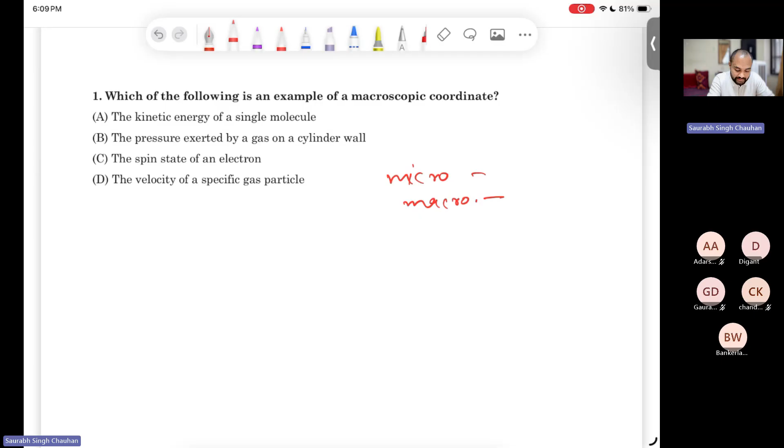Okay. So we have discussed microscopic and macroscopic. In microscopic we discussed at the particle level, the molecule level, and in macroscopic we discuss at a little bigger scale, so we assume that things are continuous. Okay. So in microscopic description,

I think someone is trying to say something.

I don't know. So option A says the kinetic energy of a single molecule. So no, we don't discuss the kinetic energy of a single molecule in the macroscopic coordinate system. Not even in microscopic. In microscopic, we have a distribution. Okay. So these many particles can have this much kinetic energy. This much percentage of particles can have this much kinetic energy. Like that we discuss in the microscopic. For a single molecule, we don't discuss like that. And in the macroscopic coordinate system, we don't discuss these things.

Okay. The pressure exerted by the gas on the cylindrical wall. So this is the correct option. Another option says the spin state of an electron. Again, this is not correct. And the last option says the velocity of a specific gas particle. Again, for a specific gas particle, we don't discuss in the macroscopic version. And in the microscopic version, we discuss some sort of distributions. These many particles can have this much kinetic energy, these many particles can have that much velocity, like that. Okay.

And the results of both of these, macroscopic and microscopic, will ultimately yield the same results. But in this course, we will mostly be focusing on the macroscopic version. Okay. So this is just like a definition. I don't think there should be any problem.

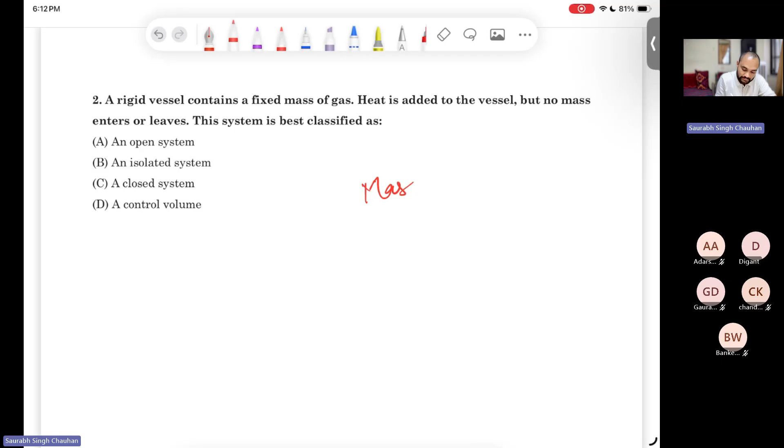The next question says, a rigid vessel contains a fixed mass of gas. Heat is added to the vessel, but no mass enters or leaves. This system is best classified as. So again, very easy question, definition based. We have discussed several types of system: open system, closed system, isolated system, control volume, adiabatic system. So you can easily answer this question, right? So which type of system is this? It is saying that mass transfer cannot take place, but heat transfer can take place. Okay.

Option C, yes, option C. In an open system, mass transfer can take place. In an isolated system, there will be no interaction, neither mass transfer nor heat transfer. In the closed system, there will be no mass transfer, but heat transfer can take place. So for this particular vessel, heat is added but no mass, so it should be a closed system. And control volume, again, is more like an open system. Okay.

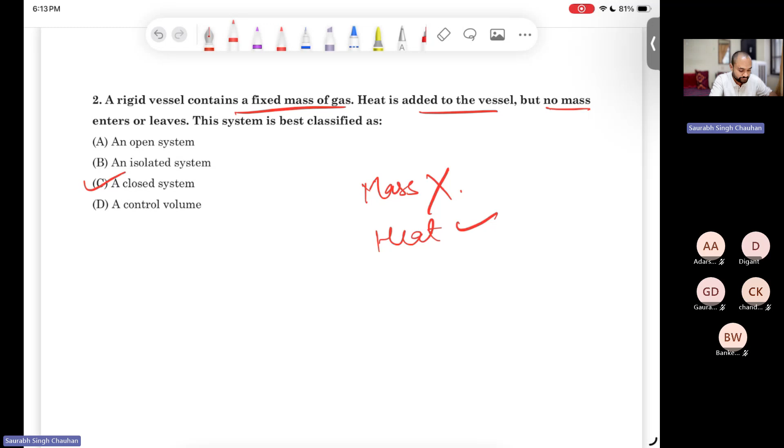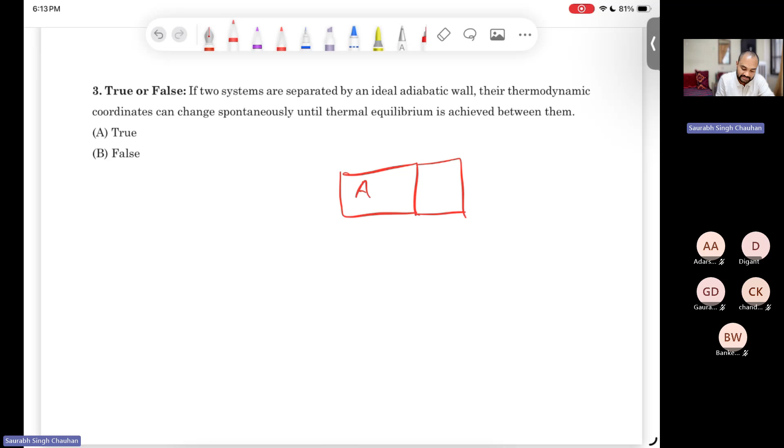The third question says, here's a statement: if two systems are separated by an ideal adiabatic wall, their thermodynamic coordinates can change spontaneously until thermal equilibrium is achieved between them. So there are two systems, system A and system B, and in between there is an adiabatic wall, and they can be at different temperatures initially. Since this wall is adiabatic, there will be no heat transfer, so they will never come to the same temperature. Thermal equilibrium will not be reached, so it should be false, right?

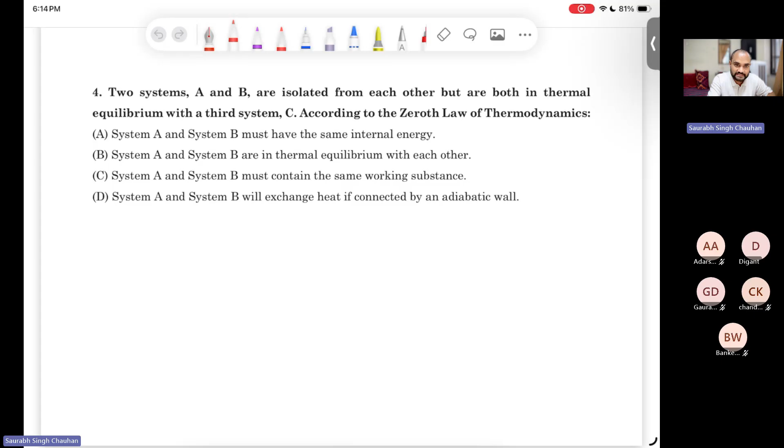I think these questions are very easy, so you can suggest that we should discuss a little more advanced questions, or keep this level, or dilute the level. As per your suggestions, I will make the questions accordingly for the next session. Okay, we need to improve, I think. Sure, sure. So from next session, I will try to bring a little more conceptual questions.

Okay, the fourth says that there are two systems, A and B, isolated from each other, but in thermal equilibrium with a third system, C. According to the zeroth law of thermodynamics, system A and B must have the same internal energy. System A and system B are in thermal equilibrium with each other. The third option says both systems A and B must contain the same working substance. And the last option says both systems will exchange heat if connected by an adiabatic wall.

So again, this is the zeroth law of thermodynamics. Two systems, A and B, are in equilibrium with C, so both of these should be in thermal equilibrium as well. That is what the zeroth law says. Option A says they will have the same internal energy. This is not correct, because they will have the same temperature, and internal energy per unit mass will be the same, but the total internal energy can be different. If system A is bigger and B is smaller, even at the same temperature they can have different internal energy.

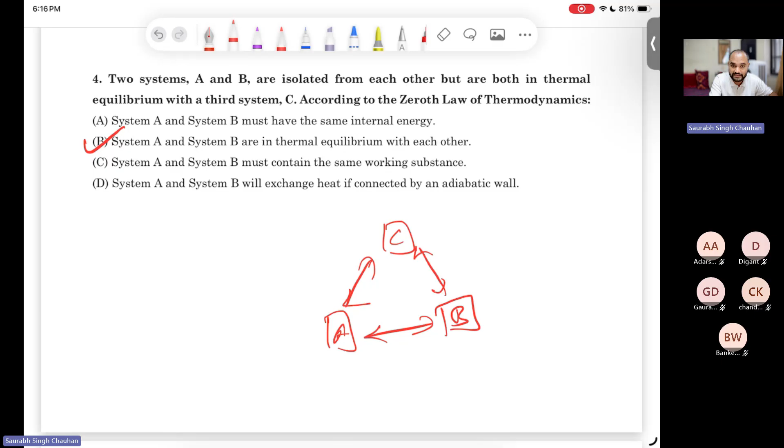And the last option says they will exchange heat if they are connected by an adiabatic wall. So if they are at the same temperature, then why should there be any heat transfer? And even if they are at different temperatures and the wall is adiabatic, again, there will be no heat transfer, right? So only option B is correct in this case. Okay.

And the fifth question says that for a simple compressible system, the equation of state relates pressure, volume, and temperature. How many of these coordinates are truly independent? So you might have studied the Gibbs phase rule, right? So if there is some phase, and there can be some independent chemical components, how many independent thermodynamic variables are there? So this Gibbs phase rule is the relation among these variables, right? So for this simple compressible system, how many independent variables are there?

So the Gibbs phase rule, if I write it, is F is equal to C minus P plus 2. Okay. So F is basically the number of independent variables, or you can say the degree of freedom. So degree of freedom is nothing but the number of independent variables.

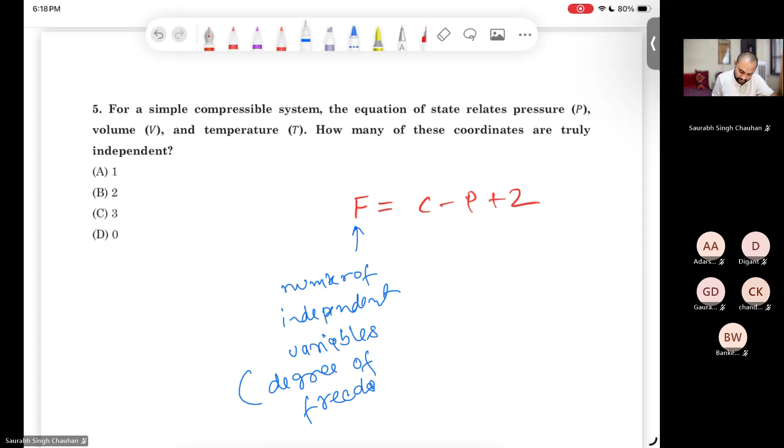C is the number of chemically independent components, and P is the number of phases. Phase means there can be some liquid phase, vapor phase, okay, like that. So for a simple compressible system, there is only a single phase, okay. So P is equal to 1, and let us assume there is only one chemically independent component.

There is any gas, or there can be some mixture, but the chemical composition is fixed, okay. The number of chemically independent components, let us say it is 1. So C is again, let us say, 1. Okay, it is saying simple compressible system. So for a simple compressible system, you can assume there is some piston cylinder arrangement with some gas, let us say oxygen. So this is a simple compressible system.

So F you can easily tell now. C minus P plus 2, so it will be 1 minus 1 plus 2. Okay, so only two variables will be independent. So the degree of freedom is 2. So here it is saying pressure, volume, and temperature. So can all three of these be independent? The answer is no. If you have any two of these, then you can find the third one from the other two. So pressure, volume, and temperature will be interrelated; there will be some function.

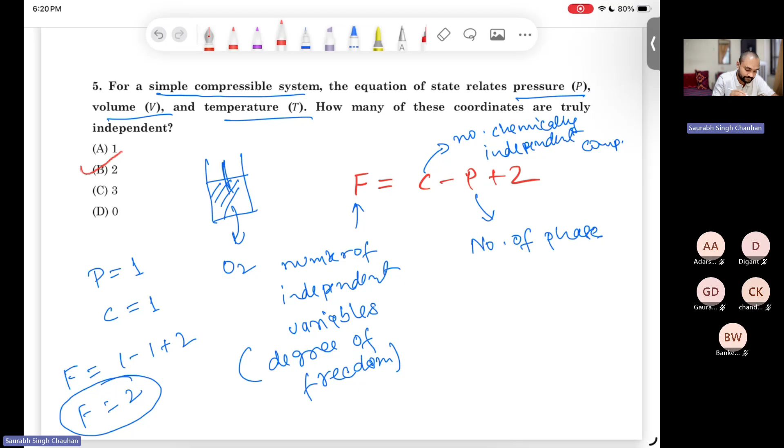So either temperature and volume can be independent, or you can have pressure and temperature, then you can calculate volume, but there will be only two independent variables. Okay, so the answer should be option B. Okay, this is the Gibbs phase rule, by the way. So I hope this is clear. If there is no doubt, then we will move to the next question.

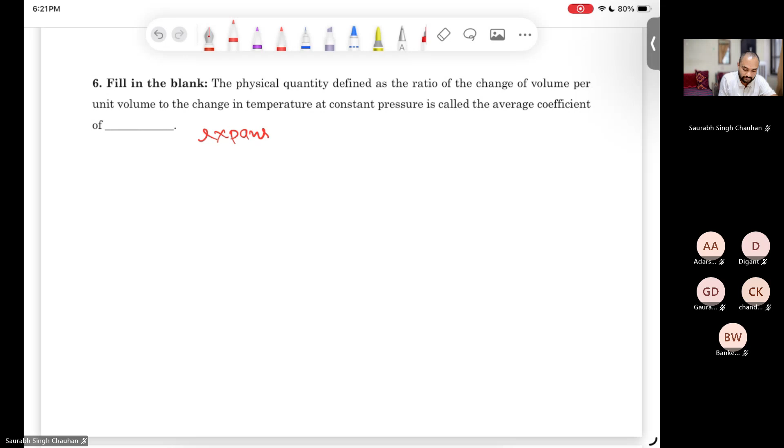Question number 6. It is saying that the physical quantity defined as the ratio of the change of volume per unit volume to the change in temperature at constant pressure is called the average coefficient of expansion, right? Or expansivity, we can say. And how do we define that? It is already saying per unit volume, so 1 by V, and change of volume to the temperature, so del V by del T. So it is the rate of change of volume per unit volume with respect to temperature at constant pressure. Okay, so this thing.

Okay, and we call this the expansion coefficient, or expansivity, you can say. So this was question number 6. Okay, now the next question.

Question number 7 says that the isothermal compressibility of a gas is defined mathematically as. So this is again a definition. We have already discussed these things in lecture. So which option is the correct one here? In the previous one, it was change of volume with respect to temperature per unit volume at a given pressure. Here it is option A. Yes, option A, rate of change of volume with respect to pressure at a given temperature and per unit volume. Okay, and there is a negative sign. Why is there a negative sign?

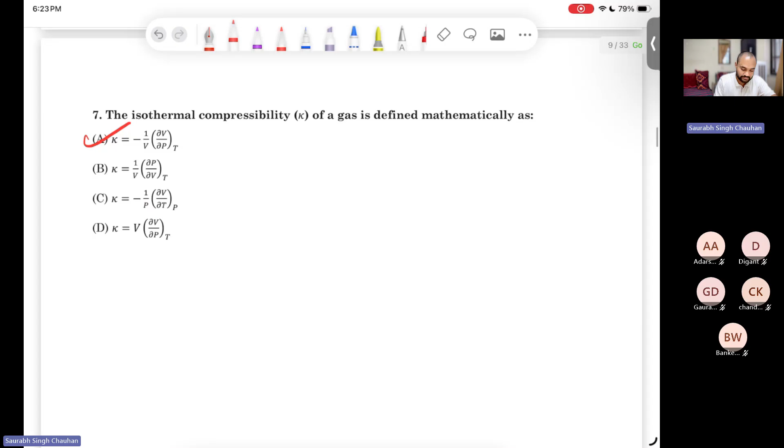We know that if we increase the pressure, then the increase in volume will be negative, or we can say that if we increase the pressure, then volume will decrease. Okay, so this quantity will be negative. And if we put a negative sign just before this 1 by V, this will make this K positive. So this will ensure that this coefficient is positive. But in the case of the coefficient of expansion, there was no negative sign. Okay.

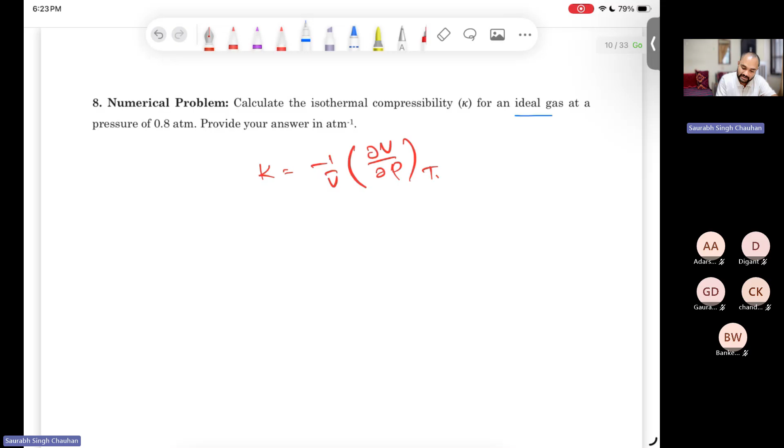Now coming to the next question, question number 8. Question number 8 says calculate the isothermal compressibility. So compressibility, this thing, right? K is minus 1 by V del V by del P at constant temperature, for an ideal gas at a pressure of 0.8, and we have to give our answer in atm to the power minus 1. So it is saying ideal gas. So for an ideal gas, what we have? We have PV is equal to RT. This is the ideal gas equation.

So what we have to find? We have to calculate the isothermal compressibility, K. To calculate K, we will have to calculate this quantity. So first of all, let us try to calculate del V by del P at constant temperature. So how will we calculate? We have this ideal gas equation PV is equal to RT. We can write V is equal to RT divided by P.

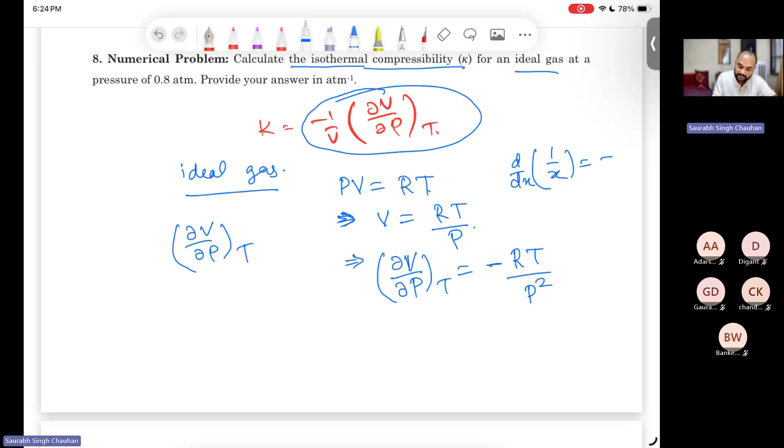So if we differentiate this V with respect to P at constant temperature, what will we get? We will get RT divided by P square, times minus 1. It is like differentiation of 1 by X with respect to X, where we get minus 1 by X square. And we need to multiply this by minus 1 by V, because K is minus 1 by V times del V by del P at constant temperature.

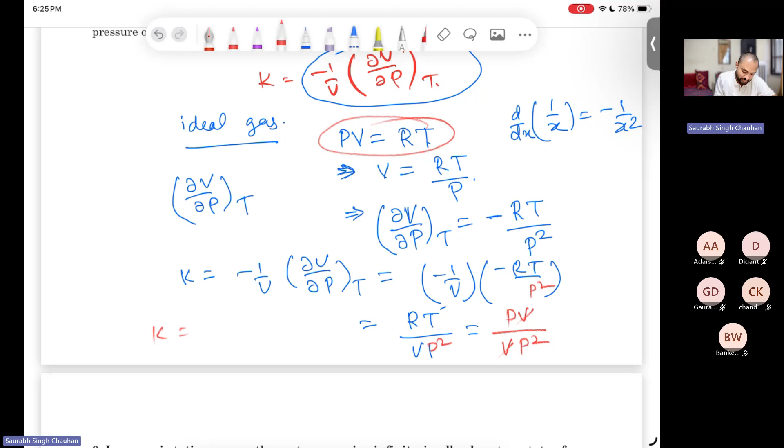This thing we have already calculated. So minus 1 by V times minus RT by P square. So we have RT by V P square. And RT, from the ideal gas equation itself, we can write as PV. So PV over V P square. So V and V will cancel out, and we will get K is equal to 1 by P.

And P here is given as 0.8 atmospheric pressure. So K will be 1 by P, that is 1 by 0.8. So you can calculate, this will come out to be 1.25 atm to the minus 1. So this is the answer. Okay. Fine.

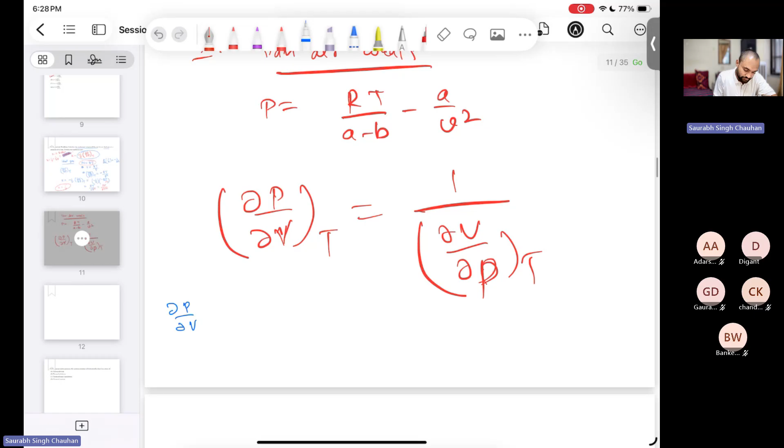Okay, I'm just giving an example. In the previous question, it was an ideal gas. So if it is not an ideal gas, then how will we proceed? So let us try to calculate del P by del V at constant temperature. So the first thing is, have I missed something?

It is not A, it is V, right? Okay, so if we try to differentiate the first term, what will we get? We will get RT divided by V minus B squared. There will be one negative sign, right? So this is the derivative of the first term. Then the derivative of the second term, it will be a minus, in place of V square, V cube, and this negative sign will make it a positive, and there will be 2, right? Power will come out as a coefficient.

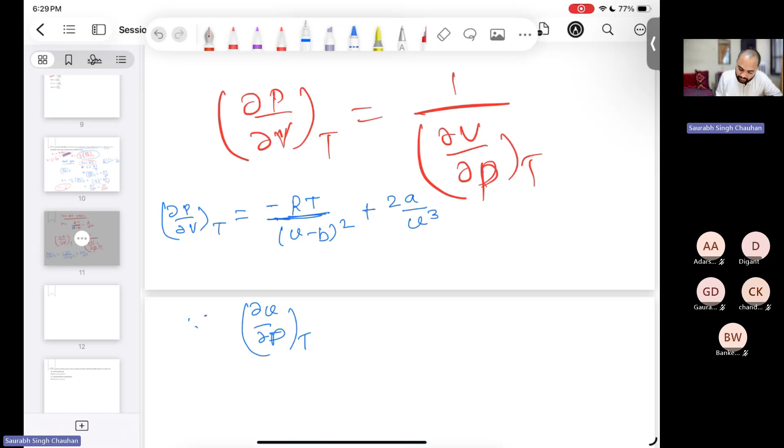Okay, so like that. And since we know that del V by del P at constant temperature will be simply the reciprocal of del P by del V at constant temperature. Okay, so we can write K is equal to minus 1 by V and this thing, right? 1 by del P by del V at constant temperature. And this del P by del V at constant temperature we have already calculated.

So what will we get? We will get 1 by V whole thing divided by minus RT divided by V minus B square plus 2A by V cube, right? Correct. So this will be K if we use this van der Waals equation instead of the ideal gas equation. Okay, so this is just an example.

So we can have some other equation. There are a lot of equations of state, right? Not just the ideal gas equation or van der Waals equation. So for a given equation of state, you can find what will be the expression for this K, right? You can find the isothermal compressibility formula for any given equation of state. Okay. So now proceeding to the next question.

Question number 9. It says that in a quasi-static process, the system remains infinitesimally close to a state of. Option A says non-equilibrium. Option B says thermal imbalance. Option C says thermodynamic equilibrium. And option D says chemical reaction. So again, a definition-based question. So a quasi-static process remains infinitesimally close to thermodynamic equilibrium. Okay.

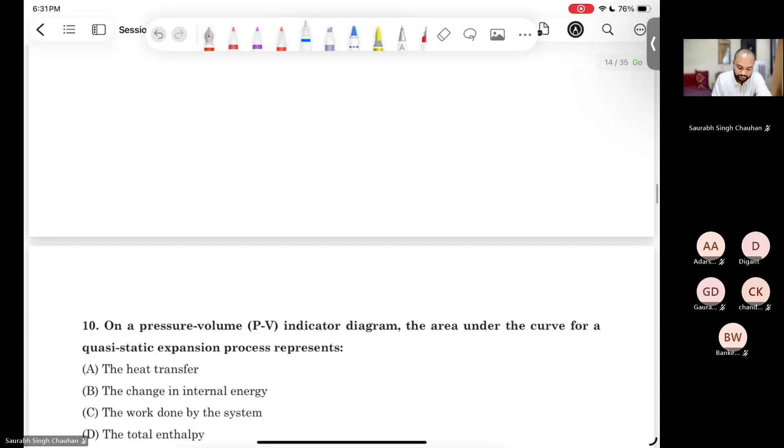Question number 10 says, on a pressure volume indicator diagram. So we know what an indicator diagram is. Indicator diagram is nothing but this PV diagram. So we call the PV diagram the indicator diagram. The area under the curve for a quasi-static expansion process represents what? We already know the area under the PV curve. This will be integration of P dV, right?

Option C. And so this will be the work done. First option, heat transfer, no. Option B says the change in internal energy, again, no. Third option says work done by the system. So this is correct. And total enthalpy, again, this is not correct. So option C.

11th question, it says which of the following expressions correctly represents the work done during a reversible isothermal expansion of an ideal gas from volume V1 to V2? What does this say? Correctly represent the work done during a reversible isothermal expansion process. Option C. Option D. D, sir. D.

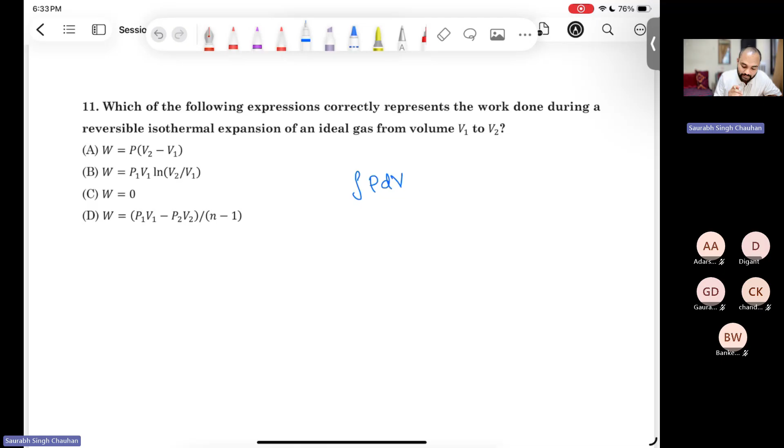Okay, we have work done is equal to area under the curve, or you can say integral of PdV. So this is work done, number one. Number two, it says ideal gas. So PV is equal to RT. Fine. Third, what does it say? It is saying isothermal. So isothermal means T is constant.

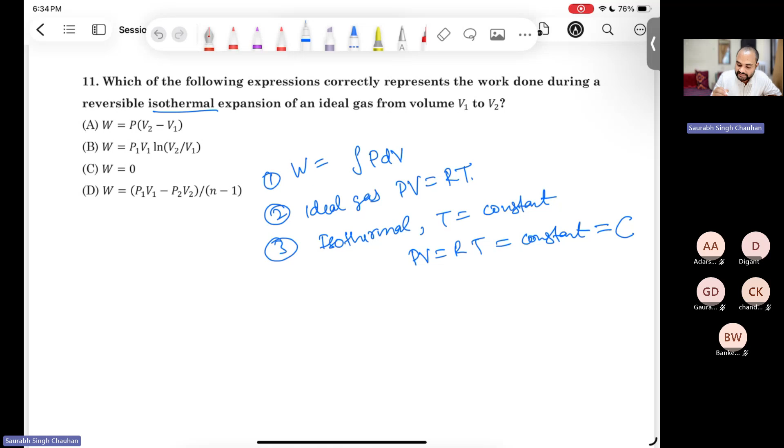Since T is constant, you can say PV is equal to RT. R is already constant, T is constant. So PV is constant. And this constant you can write as any constant. Let us say it is C. So P you can write as some constant divided by V for an isothermal process. And for work done, W is equal to integral of PdV, and P we can write as some constant divided by V, dV. It's integration from state 1 to state 2.

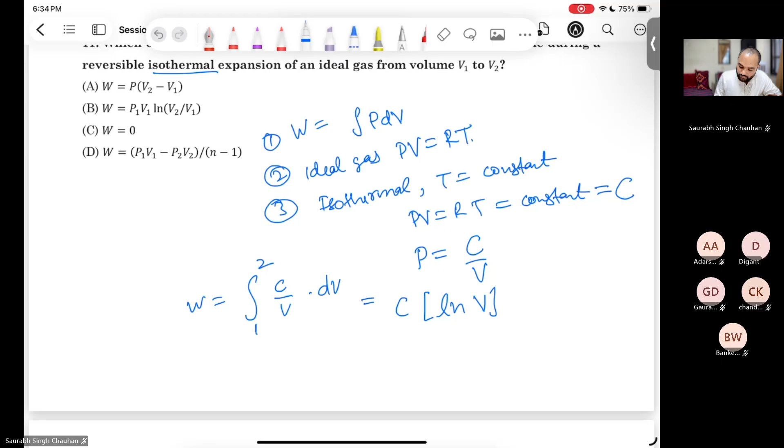So integration of 1 by V with respect to V will be ln, the logarithm of V. And this constant C will come out, right? And we will have the limits of integration, V1 to V2, right? And this will be C times ln V2 minus ln V1. And you know the properties of logarithms. If there is log A minus log B, you can write that as log of A by B, correct?

So this work done will be that constant times log of V2 by V1, correct? And this C, what was C? C was this thing, PV, that is equal to RT, that is constant.

Okay, so you can write W is equal to P1 V1 ln V2 by V1, that will be equal to P2 V2 ln V2 by V1, that will be equal to RT ln V2 by V1. Okay, so all of these three are fine.

Okay, so which option now? Option A, no, this is not correct. Option B, it says P1 V1 ln V2 by V1. This is correct. Third option says W is equal to 0. Again, this is not correct. Fourth option says P1 V1 minus P2 V2 divided by n minus 1. Again, this is not correct. So only option B, second option is correct. Okay.

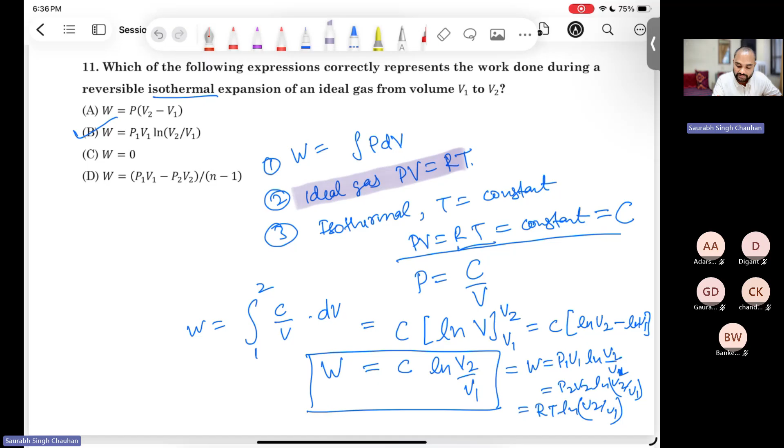So again, in this question, it was given that this is an ideal gas. So we have the equation for ideal gas. If it was not an ideal gas, or you had some other state relation, then you will use that particular relation for pressure and volume. In this particular case, we have used this relation between pressure and volume. If there is some other relation, we would have used that relation. And in that relation as well, since it is given it is isothermal, we will assume T is constant. That's what isothermal means.

Now coming to the next question, question number 12. It says that for a closed system that undergoes a cycle, the cyclic integral of heat transfer is equal to the cyclic integral of work transfer. So we know that a cycle means that we are coming back to the same state with which we started, right? And we also know that heat transfer del Q is equal to some work done plus change in internal energy. Okay.

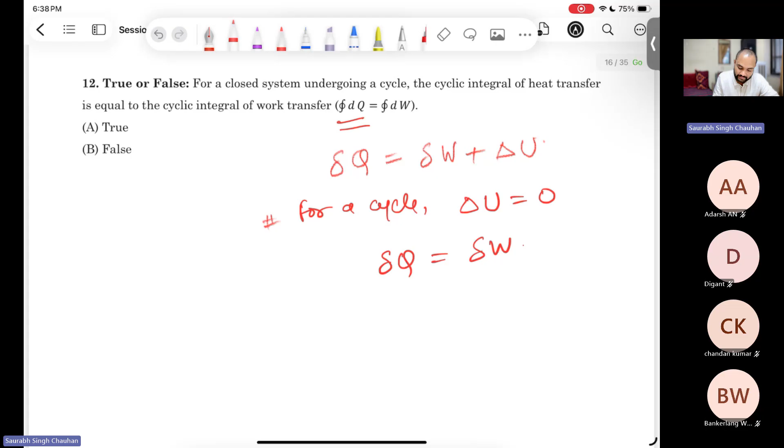For a cycle, this del U will be 0, right? Because again, we are coming to the same point. And this internal energy is a point function. So there will be no change in internal energy if we are coming back to the original state. So del Q will be equal to del W, right? So the cyclic integral of this heat transfer will be equal to the cyclic integral of this work transfer. Okay, so this is true.

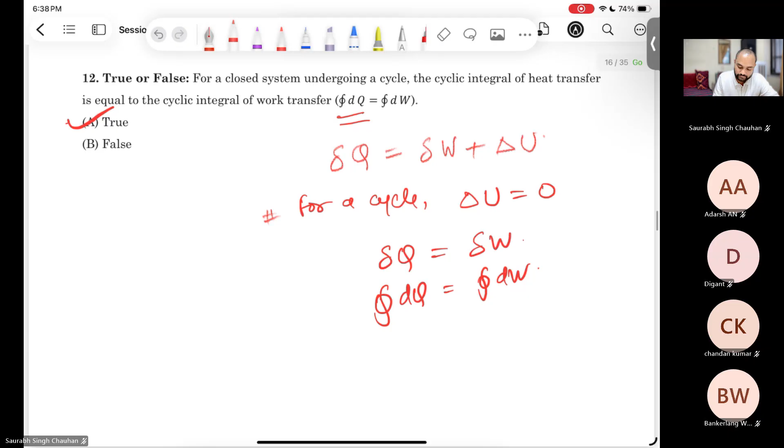Now coming to the next question, question number 13. It says the internal energy U is a thermodynamic property. Okay, it is a thermodynamic property. Work and heat, they are not properties. So we should be very clear what is a thermodynamic property and what is not. Thermodynamic properties are point functions, and point functions have exact differentials. And for what we mean by exact differentials, we have very clear mathematical expressions. I hope you have studied that. If not, we can discuss now or maybe later, but those things should be clear.

So mathematically this means that an infinitesimal change in the internal energy du is what? I said that all thermodynamic properties have exact differentials. Since internal energy is a thermodynamic property, it should have an exact differential. Option A says inexact differential. This is not correct. Option B says path dependent function. This is not correct. Third option says an exact differential. This is correct. And the last option says always equal to 0. This is not correct.

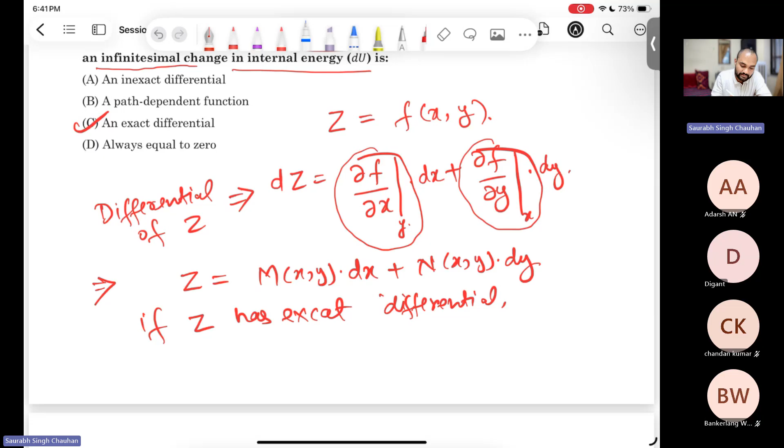Okay, so if Z has an exact differential, then it should satisfy this property. Which property?

The derivative of M with respect to y at constant x should be equal to the derivative of N with respect to x at constant y. Okay, so if it has an exact differential, then this relation should be followed.

And how we defined the differential? We defined the differential as this: dz is equal to, if z is a function of x and y, like that. Okay, so if you compare this equation with this equation, what we have is M is equal to del f by del x at constant y, and N is del f by del y at constant x.

Then del M by del y at constant x, this will be what? This will be the partial derivative of f, which is already the partial derivative with respect to x, and now you are differentiating with respect to y. This should be equal to del N by del x at constant y, and that will be equal to the partial derivative of this thing.

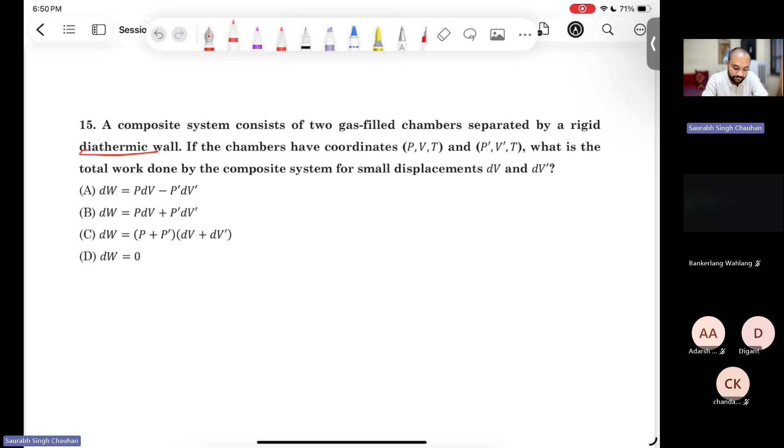Now coming to the next question, question number 15. It says that a composite system consists of two gas-filled chambers separated by a rigid diathermic wall. Diathermic means that heat transfer can take place, so this is a thermally conducting wall. One chamber has the coordinates P, V, and T, and the other chamber has the coordinates P', V', and T. I think temperatures are the same. What is the total work done by the composite system for the small displacements dV and dV'?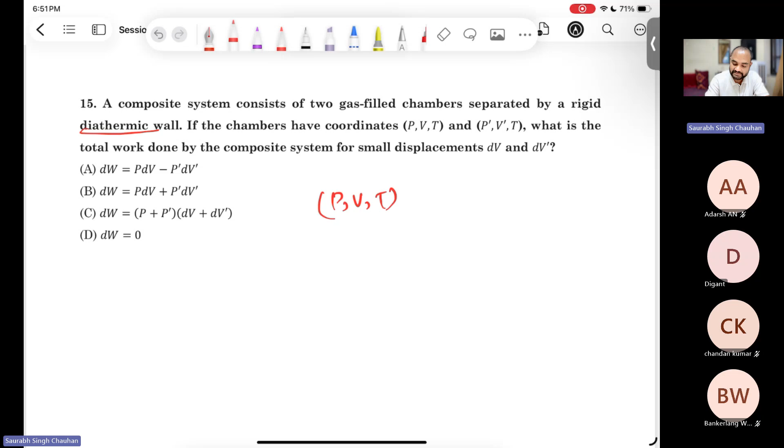So again, this is a very easy question, right? We have two chambers. For the first chamber, the coordinates are P, V, T, so the small work done will be P dV, right? For the other chamber, the coordinates are P', V', and T, so the work done will be P' times dV'. So the total dW will be P dV plus P' dV'. So option B should be the correct option.

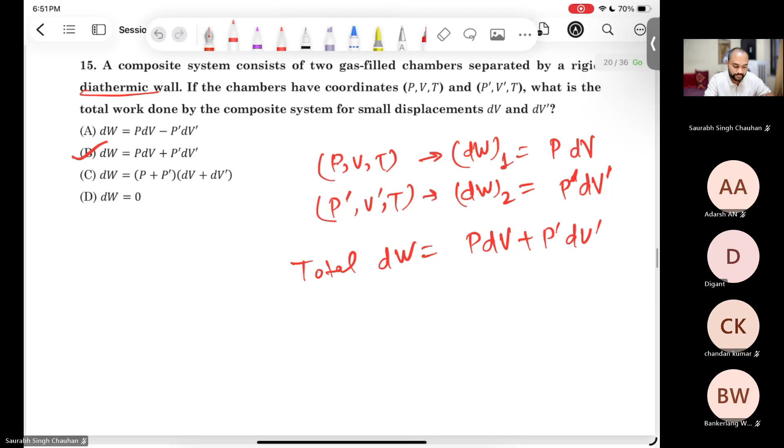Now question number 16. Which mode of heat transfer is governed by the Fourier law and depends only on the thermal conductivity of the material? Natural convection, forced convection, thermal radiation, or heat conduction? We know that this is simple heat conduction. And what will be the rate of heat conduction? K dT by dx per unit area, right? If you also multiply by the area, you will get the total heat transfer rate. This is Fourier law.

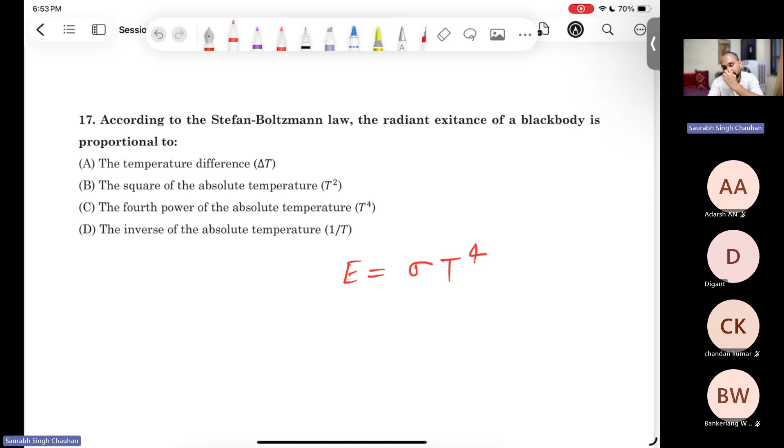Now coming to question number 17. This is regarding radiation. According to the Stefan-Boltzmann law, the radiant exitance of a black body is proportional to what; basically it is asking the radiation heat transfer rate. What is Stefan's law? The rate of heat transfer is equal to some proportionality constant, let us say sigma, times T to the power 4. And all these temperatures are in Kelvin. Wherever it is not mentioned, keep in mind it is in Kelvin. When calculating temperature differences we can sometimes take Celsius, but in general always take Kelvin.

So options A and B: the temperature difference, the square of the absolute temperature T squared. Option C says the fourth power of the absolute temperature, T to the power 4. So this is correct. The last option says the inverse of absolute temperature, which is not correct. So the third option only.

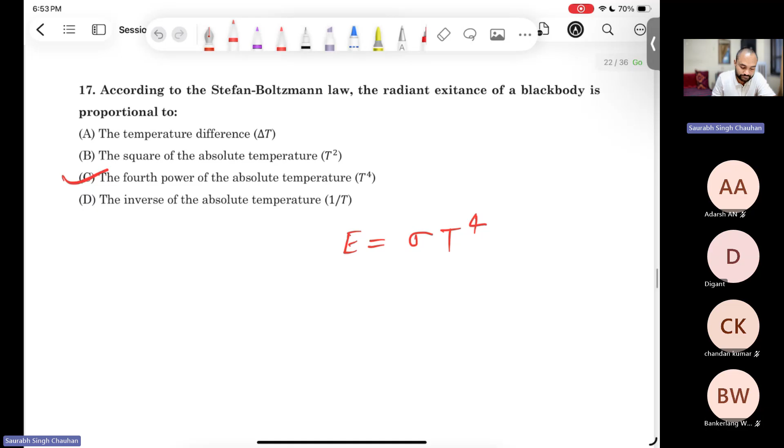Now coming to question number 18, it says to calculate the power required to accelerate a 900 kilogram car from rest to a speed of 80 kilometer per hour in 20 seconds on a level road. So level road means height is not changing. So potential energy will be constant. Potential energy change will be 0. So only kinetic energy will change.

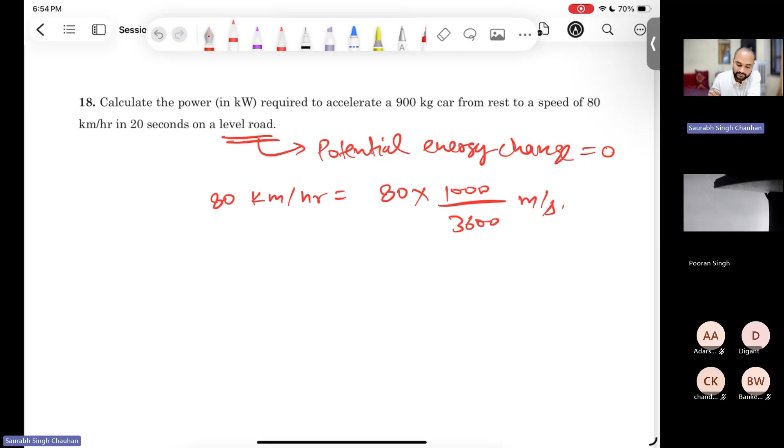Okay. And initially kinetic energy was 0. And finally, after 20 seconds, the speed will be 80 kilometer per hour. First of all, we should convert this 80 kilometer per hour into meter per second. So if you convert this to meter per second, it will be 80 times 1000 divided by 3600, right? Meter per second. And I will use calculator. It is coming out to be 22.22. Is it correct?

So initially the kinetic energy is 0 and finally kinetic energy will be this half mv squared. Okay, so the change in kinetic energy will be 1/2 times 900 kilogram times 22.22 meter per second squared. Okay, so these many joules we will have. So I will put the direct values. You can cross check the calculations. If there is any miscalculation, just let me know. Okay, so this is the change in kinetic energy.

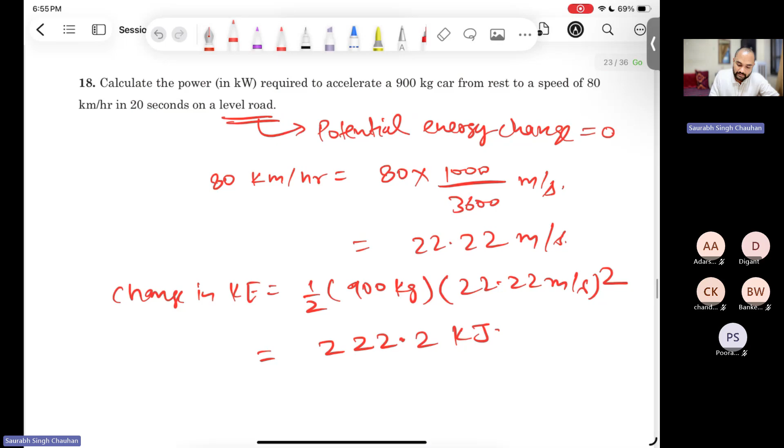And we will assume that the power is constant throughout these 20 seconds. So the power will be what? The power will be rate of change of this energy, right? Power is work upon time, right? And whatever work is being done, that is being converted into kinetic energy, right? We are assuming that temperature is remaining constant. Okay, so whatever work we are transferring, all of that work is being converted into kinetic energy.

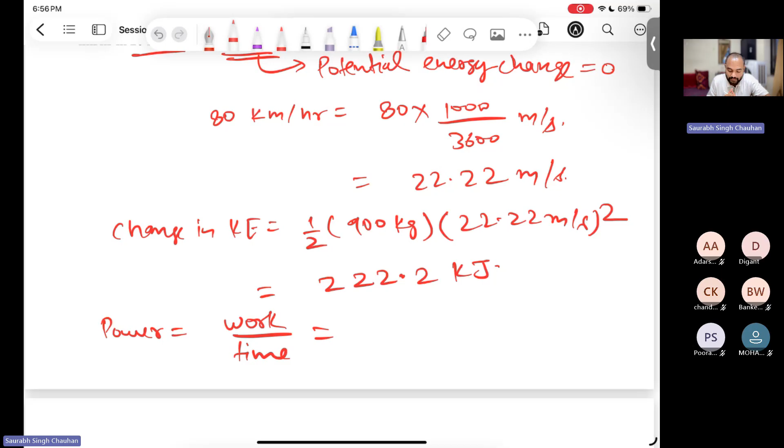Temperature is constant, so internal energy is not changing, and we are assuming that we are not providing any heat. Okay, at least not as an external heat. Okay, whatever we are providing, we are providing some work. Okay, so this will be 222.2 kilojoule divided by 20 second. So what will we have? We will have 11.11 kilowatt. This will be the power. Okay.

Now coming to the next question, question number 19. It says a person is standing in a breezy room. Okay, so there is some air flow at 20 degrees Celsius. Okay, the exposed surface area of the person is 1.6 meter square and their average outer surface temperature is 30 degrees Celsius. The convective heat transfer coefficient is 6 watt per meter square Kelvin. The emissivity is 0.95 and the Stefan Boltzmann constant is 5.67 times 10 to the power minus 8 watt per meter square Kelvin to the power 4.

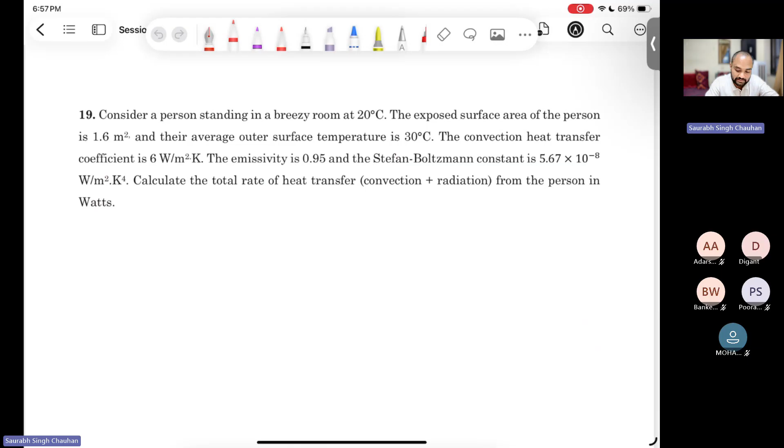We have to calculate the total rate of heat transfer. So here we have both convection and radiation. So total heat transfer from the person in watt. Okay. So it is again very simple question. You can calculate what will be the heat transfer because of this convection, and what will be the heat transfer because of this radiation. Okay. So because of this convection, what will be the heat transfer rate? This will be convective heat transfer coefficient times this area times the temperature difference.

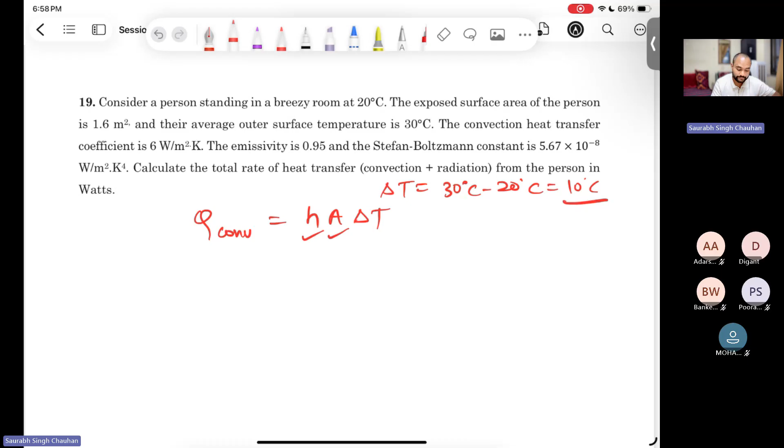Okay. The temperature difference delta T will be 30 degrees Celsius minus 20 degrees Celsius. So 10 degrees Celsius. Okay. And temperature difference you can write in Kelvin or centigrade, both are same thing because we are talking about difference. Okay. And heat transfer coefficient is given, area is given, temperature difference we have 10. So you can calculate heat transfer rate because of convection. And because of radiation, what will be the heat transfer rate?

This will be sigma times T1 to the power 4 minus T2 to the power 4. Okay. For a black body, but it is not black body. Emissivity is given. Okay. So epsilon is given to be 0.95 and the sigma is also given, 5.67 times 10 to the power minus 8 in SI units. And temperatures, you'll have to put the temperatures in Kelvin, then we can find this Q radiation.

Okay. And the total heat transfer rate will be... Is it T1 raised to 4? To the power 4, no? 4. Sorry. 4. Yes, thank you. So radiation plus convection, this will be the total heat transfer rate. Okay.

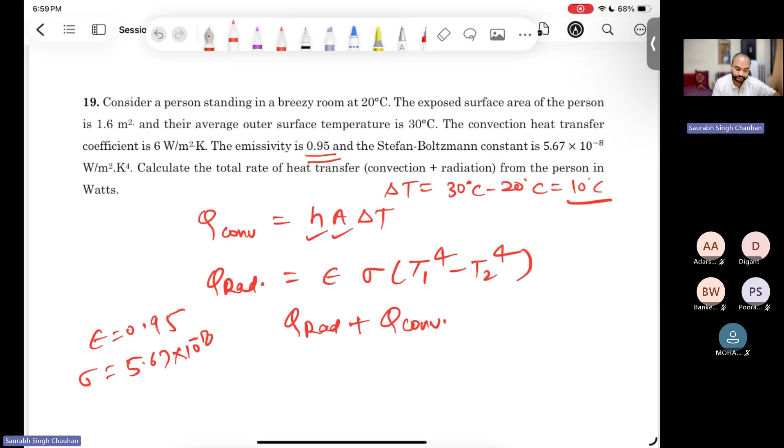One thing you should keep in mind: you should not make this mistake that sometimes students write, like sigma delta to the power 4, delta T1 to the power 4 minus T2 to the power 4. This is not correct. This is correct. I think this you can calculate by yourself. This is not a big deal. So now I think you can move to the next question.

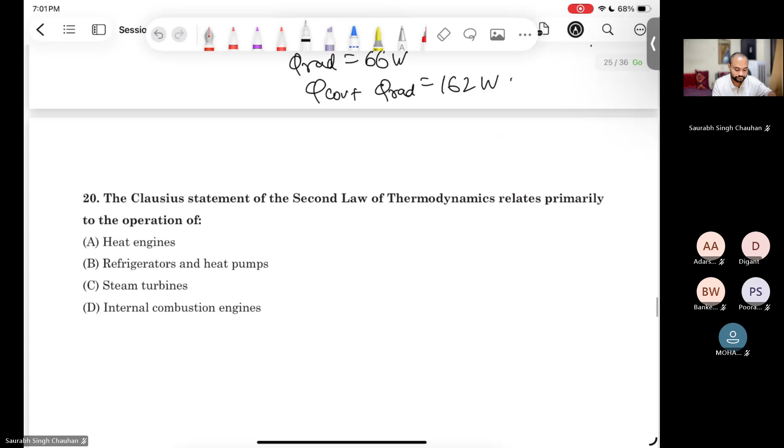I will write the answer so you can check it yourself. I'm writing the values. Because of convection, it is coming out to be 96 watt, and because of radiation, it is coming out to be 66 watt, and the total convection plus radiation is coming out to be 162. So you can cross check these values. If there is any miscalculation or any mistake, just let me know.

So question number 20. All these questions are more like the revision, or you can say the basics of all these basic courses, thermodynamics, heat transfer. Question number 20 is about the second law, and you have studied the second law in the form of two statements. One is the Clausius statement, another is the Kelvin statement. This question is about the Clausius statement of the second law of thermodynamics.

So what does the Clausius statement say? It will be for refrigerators and heat pumps. It says the cyclic integral of dQ by T should be less than or equal to 0. That is the Clausius inequality, and that is correct. But the Clausius statement of the second law that I am talking about: we cannot pump heat from a low temperature body to a high temperature body without any external work. We can transfer heat from a low temperature body to a higher temperature body, but we will require some external work. So that's what the Clausius statement says.

And when we are transferring heat from a lower temperature body to a higher temperature body, basically we are talking about a refrigerator or a heat pump. So this is more directly related to heat pumps and refrigerators. The Kelvin statement is another statement of the second law, but both of these statements are equivalent, and you can prove that. If any one of the statements is violated, then the second one will automatically be violated.

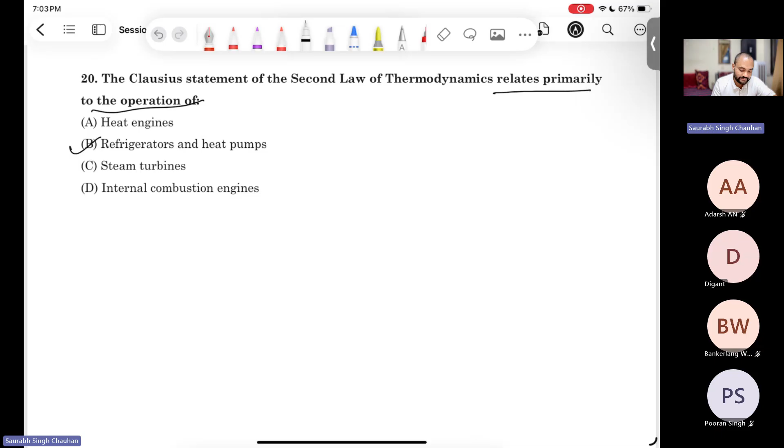So, relates primarily to the operation of. Technically, it will be applied to all systems, all machines, but more directly it is related to those kinds of machines which transfer heat from lower temperature to higher temperature, and those machines are refrigerators and heat pumps. Fine. This is an easy question.

Now coming to the next question, question number 21. It says that it is impossible to construct an engine operating in a cycle that produces no effect other than extracting heat from a reservoir and performing an equivalent amount of work. This implies the impossibility of. It is saying that it is impossible to make an engine that will just take some heat from a reservoir and convert all that heat into work without rejecting any heat to a lower temperature thermal reservoir.

So if we somehow made that type of machine, then we would be violating which law? The second law of thermodynamics. And what will we call that type of machine? A perpetual motion machine of the second kind. If a machine violates the first law of thermodynamics, it will be a perpetual motion machine of the first kind. And if it violates the second law, it will be a perpetual motion machine of the second kind.

And it is saying that you cannot construct such a machine which produces no effect other than taking heat from a reservoir and performing equal work without rejecting any heat to the lower temperature thermal reservoir. This is basically the second law. This is basically Kelvin's statement. Correct? Option B.

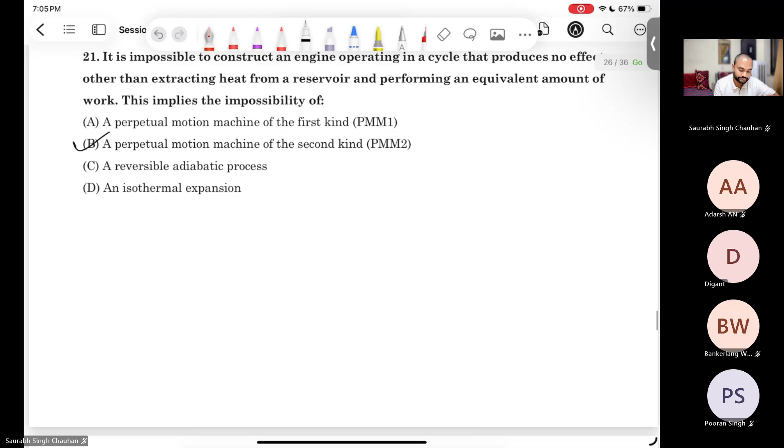Because an engine that violates the Kelvin-Planck statement will convert 100% of the absorbed heat into work, so it will have 100% efficiency. That machine will be a perpetual motion machine of the second kind, and these perpetual motion machines don't exist.

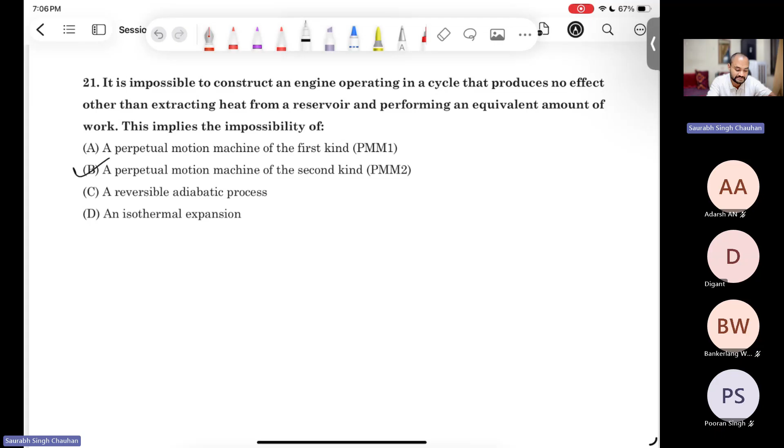I believe most of you are thinking it is quite obvious that we cannot make a perpetual motion machine of the second kind. But there was a time in history when people got patents for such machines. Today we have studied thermodynamics and these things seem very obvious. If some person says, I have designed a machine that will run continuously without any external energy source, or a machine that has 100% efficiency, we know that it is not possible.

But at some point of time, people got patents for such machines, and later it was proved that they were fake machines. They were doing some tricks; for example, they had some hidden energy source.

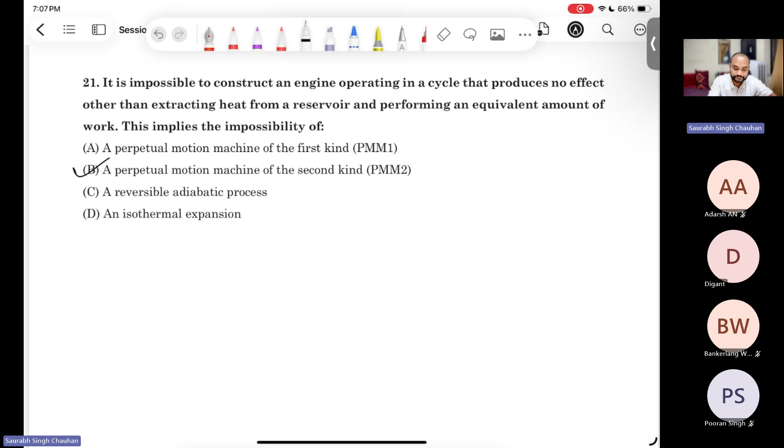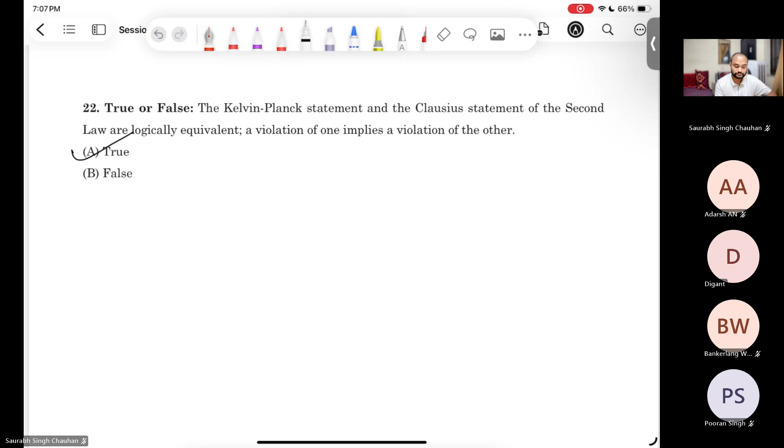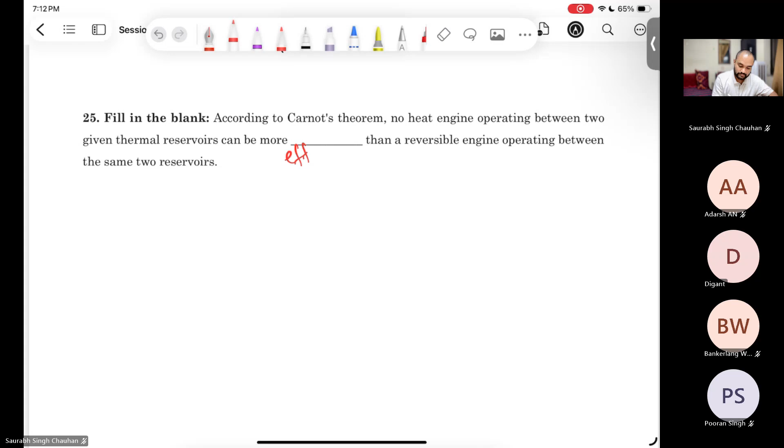So Carnot engine is the most efficient one. Okay, so again, this is an easy question. I think we can move to the next question. Now coming to question number 26. It says that the coefficient of performance of a heat pump and refrigerator, which are operating between the same temperature limits.

What is the relation? What is the coefficient of performance of a heat pump? And what is the coefficient of performance of a refrigerator? So both of these are defined. What is our purpose? What purpose we are solving and what cost we are solving.

Okay. So the purpose of this refrigerator is to remove the heat from the low temperature reservoir. So remove QL. And what is the cost? Cost is what external work we are providing. Okay, the compressor that we use. So to that compressor we are providing some work, and that cost is that work. Okay, so this is the coefficient of performance of refrigerator.

And what is the purpose of heat pump? Heat pump basically tries to heat your room, heat your house. Okay, so basically we are adding some heat to a high temperature reservoir. We are adding some QH to the high temperature reservoir. Again, we are providing some work in the form of compressor, W net. Okay.

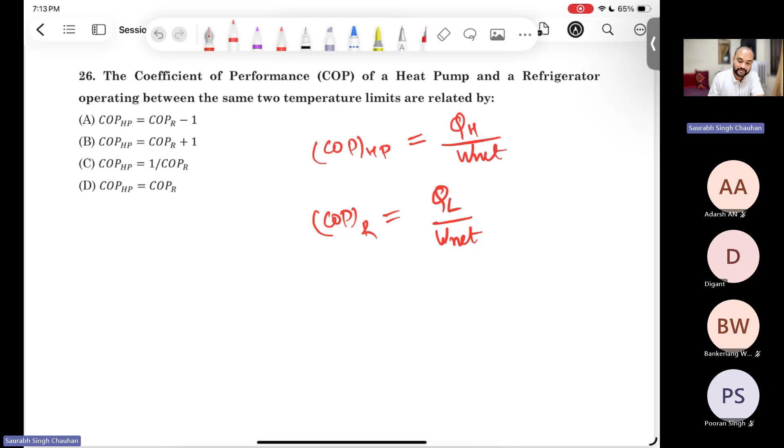And this W net, we know this is QH minus QL, right? Correct. So QH is basically W net plus QL. So for a case of heat pump, it will be W net plus QL divided by W net. Okay, so this will be 1 plus QL by W net. This is the COP of heat pump. And COP of refrigerator is QL by W net.

Okay, so if you compare these two expressions, you can clearly say that coefficient of performance of heat pump is 1 plus another term, and that term is equal to coefficient of performance of refrigerator. So which option is correct? Option A is not correct. Option B, COP of heat pump equals COP of refrigerator plus 1. This is correct. Third and fourth are not correct. So second option is correct. Now move to the next question.

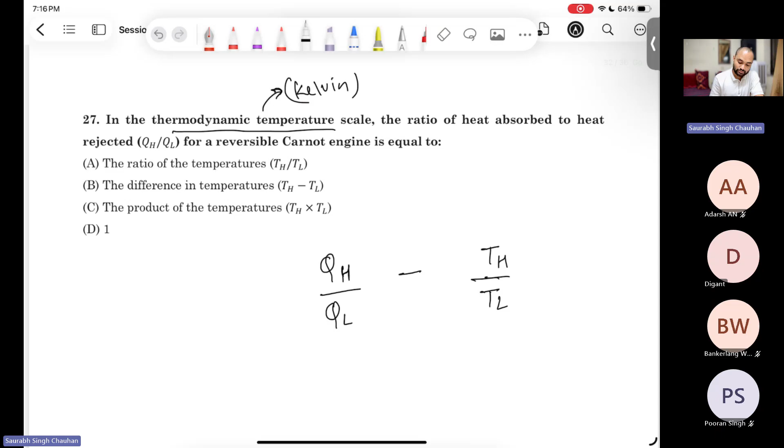So the efficiency is the work output divided by how much heat we are taking. That becomes QH minus QL by QH, which is 1 minus QL by QH. And since QL by QH equals TL by TH, this efficiency in terms of temperature is 1 minus TL by TH. Because of this relation only, this formula is possible. And actually, this is the way this temperature scale is defined, intentionally.

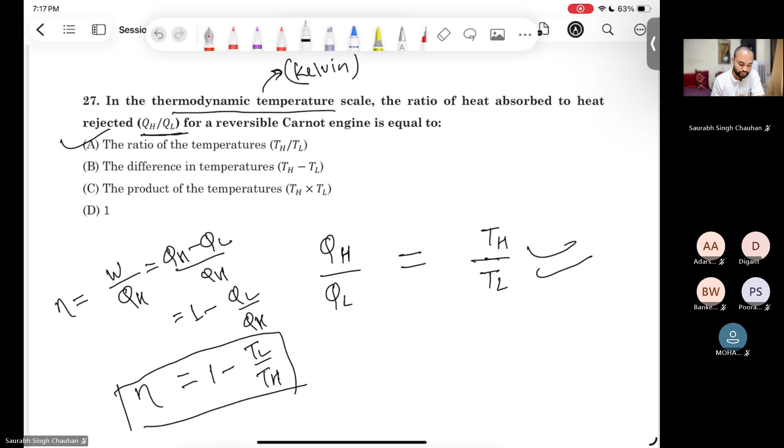Anyways, what was it asking? It was asking that QH by QL will be equal to what? So this will be equal to TH by TL. So option A is correct. Now we have a few more questions. Let's try to solve them quickly.

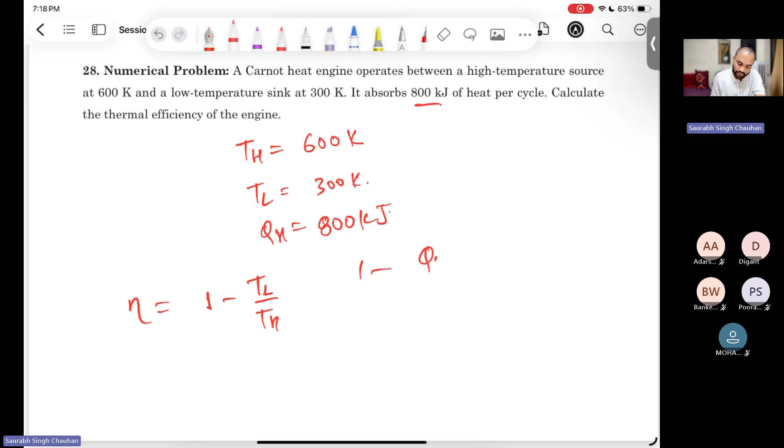28, it says a Carnot heat engine operates between a high temperature source at 600 Kelvin and a low temperature sink at 300 Kelvin. It absorbs 800 kilojoule of heat per cycle, so QH is 800 kilojoule. Calculate the thermal efficiency of the engine. It was 1 minus QL by QH, which in terms of temperature becomes 1 minus TL by TH. So 1 minus 300 divided by 600, which is 1 minus 0.5. So 0.5 is the efficiency, or 50%.

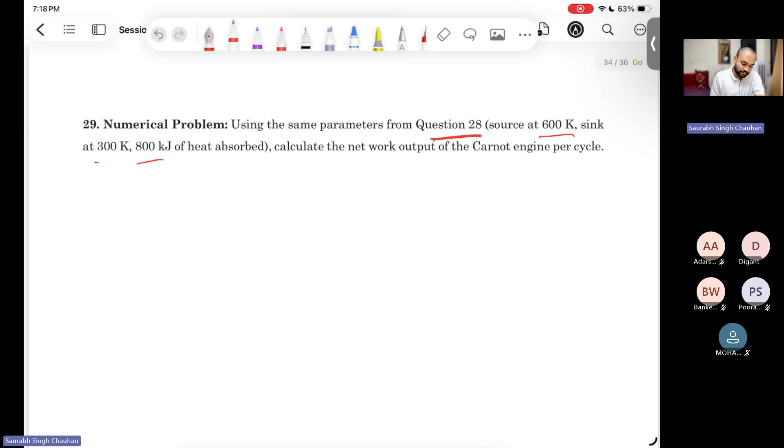Okay, very easy question. I hope there is no doubt. So we'll move to the next question. Question number 29. It says using the same parameters from 28. So, same parameters means source at 600 Kelvin, sink at 300 Kelvin, and 800 of heat is absorbed. So QH is 800. Calculate the net work output of the Carnot engine per cycle.

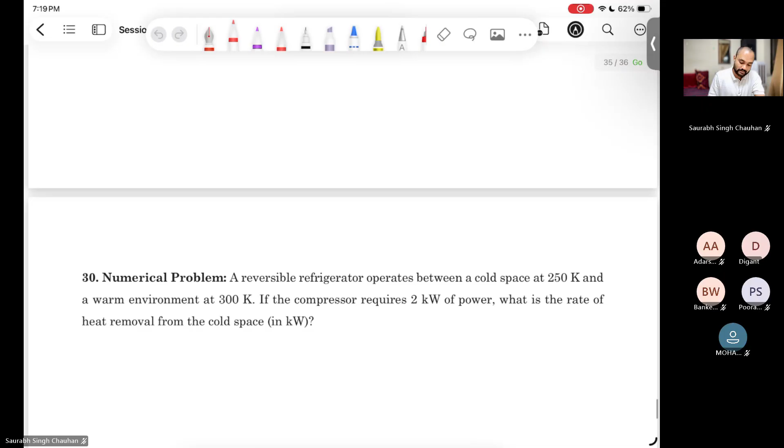So efficiency is defined as this net work output divided by how much heat is taken from the high temperature reservoir. And efficiency we have calculated was 0.5, or you can say 50%. This will be equal to the net work produced per cycle divided by the total heat absorbed per cycle. Okay, this is not in Kelvin, this is in kilojoule. 800 kilojoule. So the net work output will be 400 kilojoule, correct? Again, very easy it was.

Now, question number 30, it says a reversible refrigerator operates between a cold space at 250 Kelvin. So temperature of low temperature space is 250 Kelvin. And a warm environment, so the high temperature reservoir is at 300 Kelvin. If the compressor requires 2 kilowatt of power, so the W net that you are providing to the compressor is 2 kilowatt. What is the rate of heat removal from the cold space in kilowatt?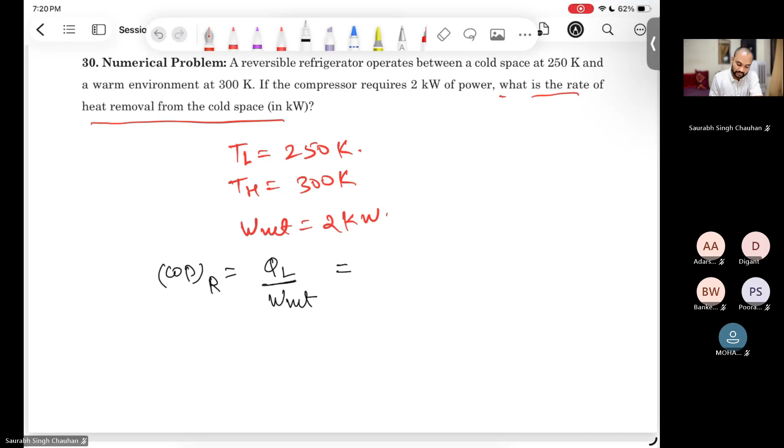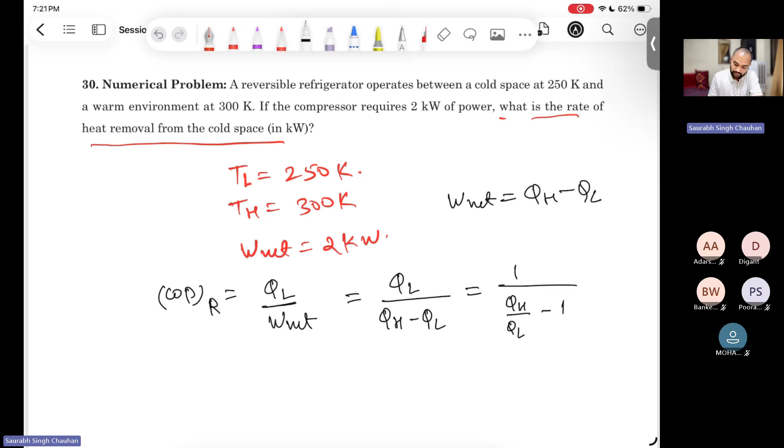So this is a refrigerator, and coefficient of performance of refrigerator we just discussed. It was how much heat we are removing from the low temperature reservoir, QL, at what cost? W net. And W net is QH minus QL, right? So this will become QL divided by QH minus QL, and you divide numerator and denominator both by QL, so you'll get 1 divided by QH by QL minus 1. And QH by QL you can write in terms of temperature as TH by TL minus 1.

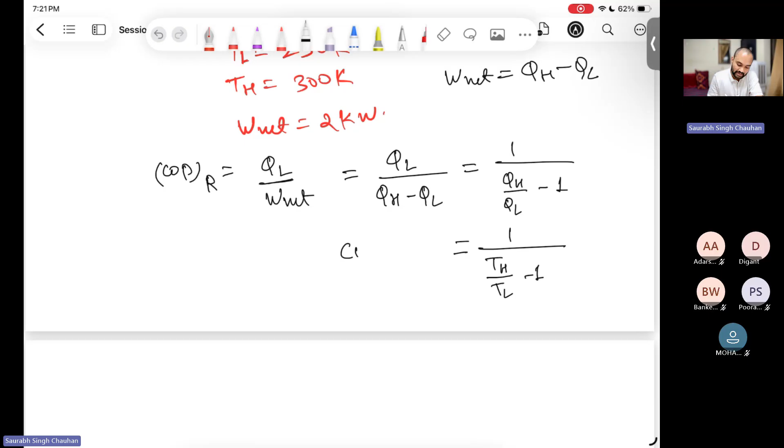I hope you already remember the formula for coefficient of performance of refrigerator in terms of temperature. I am just writing so that if you forget, or if you are asked to derive, you should be able to do that. So it will be equal to 1 divided by TH, which is 300 Kelvin, by TL, 250 Kelvin, minus 1. So the COP comes out to be how much? You can calculate this value. This is coming out to be 5.

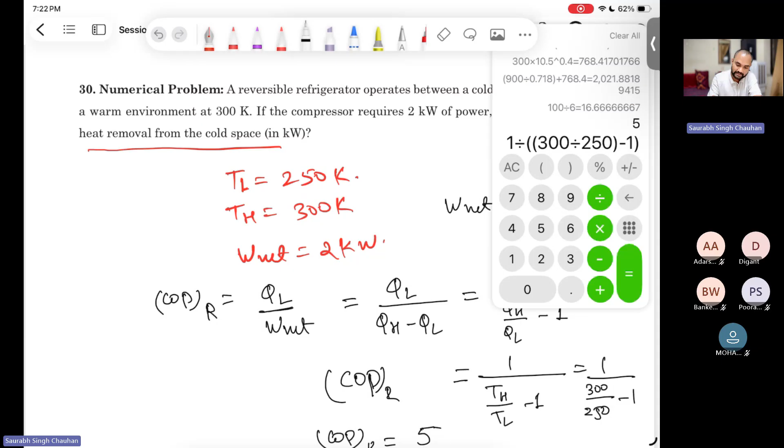We will just cross check. So it is 1 divided by 300 divided by 250, minus 1. So it is coming out to be 5, correct? So yes, this is 5. And what we have to tell is the rate of heat removal from cold space.

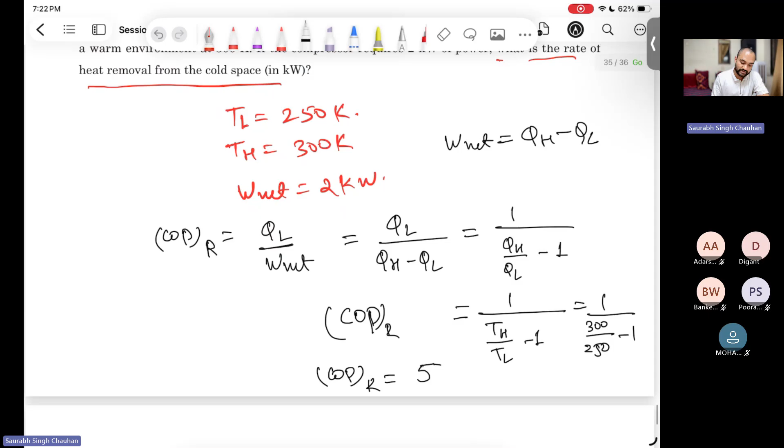So for the rate of heat removal from cold space, we have the formula: COP of refrigerator is QL divided by W net. And the COP we have calculated is 5. And W net is given as 2 kilowatt. So QL will be 5 times 2 kilowatt, so QL will be 10 kilowatt. So it is clear, I hope.

So you don't need to memorize anything. If you already know the formula, it is well and good for you, because in exams it is always good to remember some formulas and expressions. But if you are asked to derive or you somehow forgot, then you can do it step by step. So this was the last question.

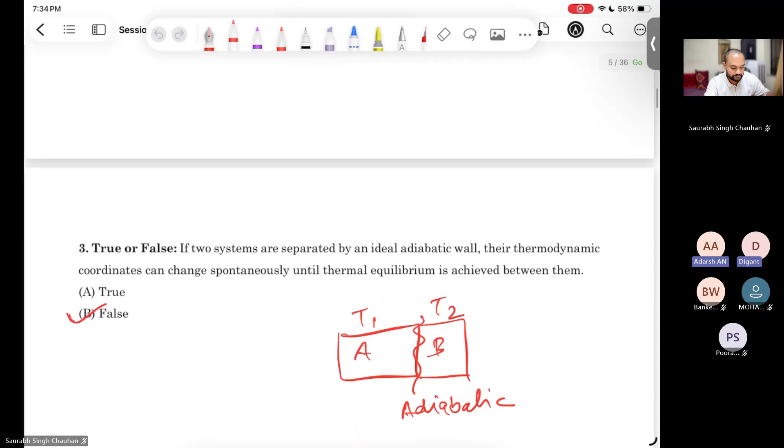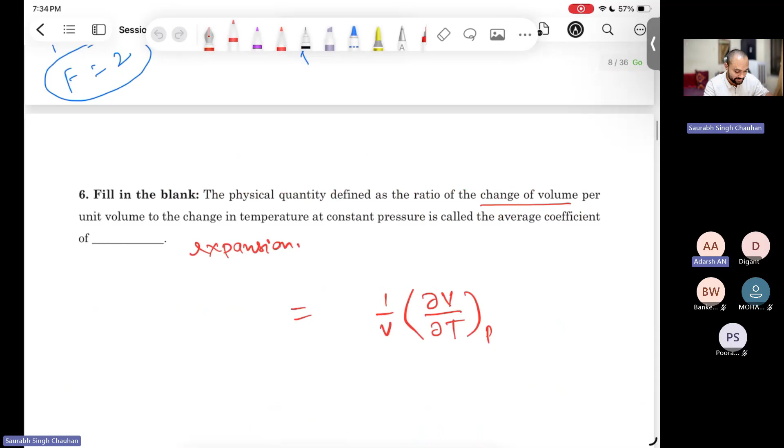Sir, may I ask a question? In that first week lecture, we were repeatedly talking about the hydrostatic system. Generally, we talk about thermodynamic systems. So why specifically here are we limiting to the hydrostatic system? I will have to revisit that section. In fact, when I was preparing question number 5, it was saying that for a hydrostatic system, the equation of state, how many are independent? But I intentionally changed that to simple compressible system, because most of the time we say simple compressible system. We don't want to limit ourselves to the hydrostatic system, right?

So I will go through that section and try to understand the context, then I can discuss it in the next session. I have noted down this query: why specifically hydrostatic? This is in lecture 1, right? Yeah, I think the whole lecture is mainly talking about properties or processes associated with hydrostatic systems. Maybe he is trying to simplify something, but I'm not sure what. I will try to get the context and we will discuss in the next session.

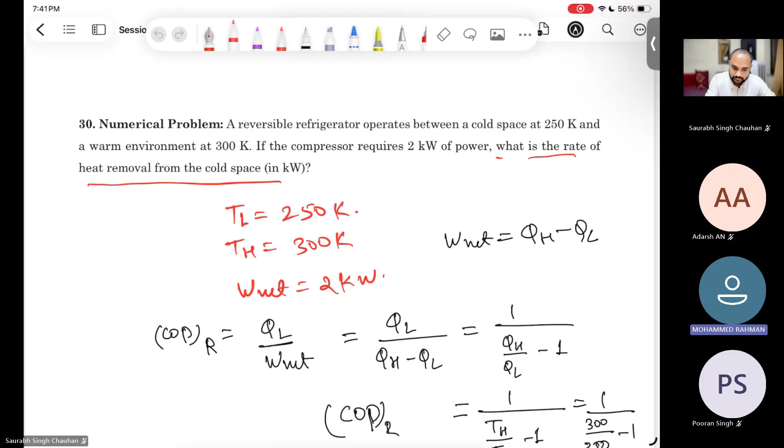Okay. Sir, one last question. In conduction, Fourier's law of conduction, we have some significance of the minus sign. Significance of the sign? I had written it somewhere, right? Here, yeah. Yes, here we have the sign due to the temperature difference. Minus k into T1 minus T2, right? We are writing it like this because heat flows from higher temperature to lower temperature.

Yes, sir. The question is, why don't we have the sign significance in the convection law that we are calculating? No, it depends. You can put any sign. It should be clear to you whether your system is gaining heat or losing heat. If your system is at higher temperature and your surrounding is at lower temperature, your system is losing heat. Then if it asks what is the rate of heat addition to the system, we should get a negative sign, right?

This sign and all these things depend on the context, whether you should put this negative sign or not. Okay. Okay, sir. No issue.

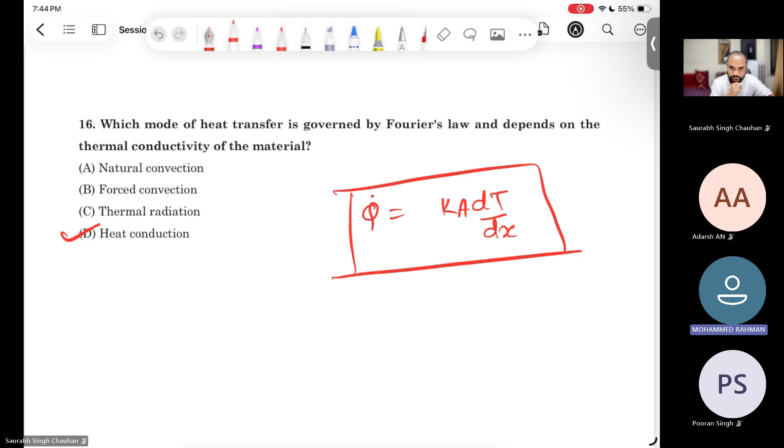Okay, sir. No, sir. In some university exams, the question will ask, what is the significance of having a negative sign in the Fourier law of conduction? So in that sense, I am asking you. So that is because of the definition of that gradient sign. Okay.

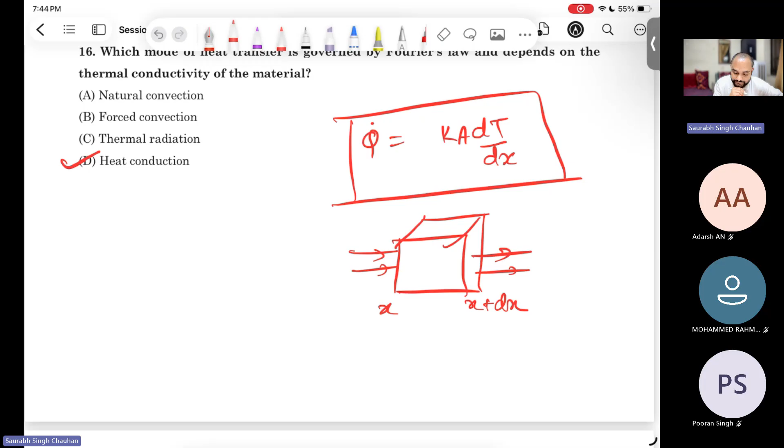So what we usually do, we take, for example, this type of a system. Okay, this is x plus dx, and how we define gradient. Some heat is coming from this side, some heat is lost from this side. The temperature of this side is, let us say, T. Here the temperature is T plus dT, and then what will be the temperature gradient? Temperature gradient will be dT by dx. Okay, and some heat is coming at this point, some heat is going from this point.

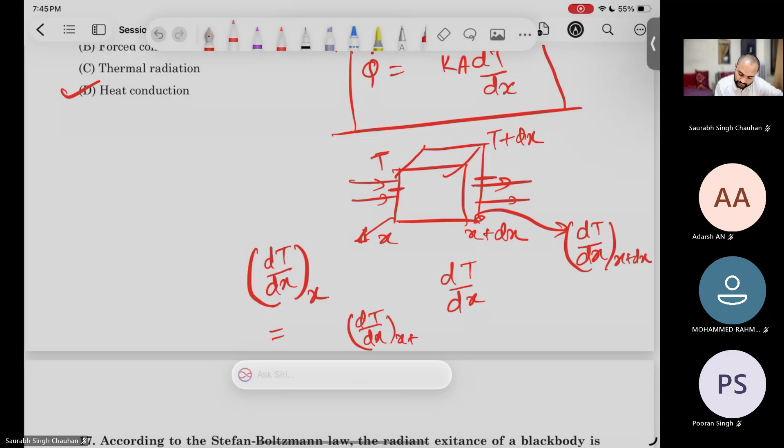So at this point, how much heat is going? At this point, heat is going dT by dx at x. Okay, I'm not writing those coefficients. And at this end, how much heat is being lost, that will be dT by dx at x plus dx. And the total rate of heat that is being added to the system will be dT by dx at x plus dx, sorry, minus dT by dx at x.

Okay, and this change will be what? This will be the derivative of this thing, d by dx of dT by dx times dx, correct? So this will be d square T by dx square times dx, right? So this is heat that is being added to the system. Right?

Hello? Yes, sir. Yes. So this is fine. I mean, where is the problem? I don't understand. So you just bring that particular question, or that type of thing, then we can have better clarity on what the real doubt is. But I think I got your point, that sometimes they are putting the negative sign, sometimes they are not putting the negative sign.

Okay. So my suggestion is that you should have a feel. Your intuition should work, and you should know whether it is asking how much heat is being added or how much heat is being taken out. Because I remember in class 12th, the chemistry teacher was putting a negative sign, the physics teacher was not putting a negative sign for the work done formula. You remember that? Yes, sir. Yes, sir. So it is all about the definition. Okay.

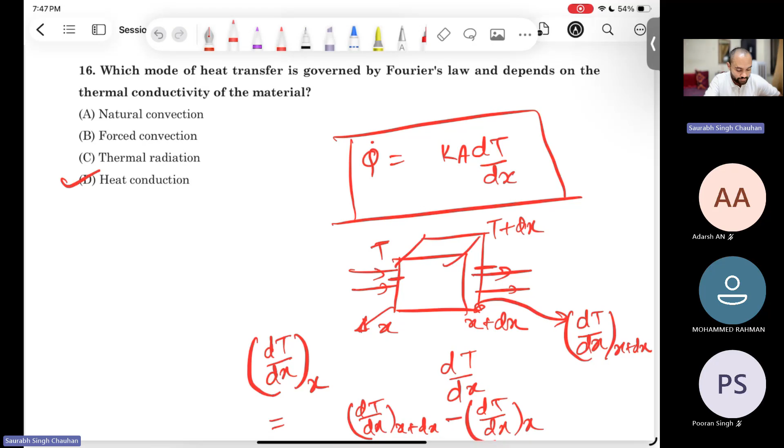Probably we can discuss it in more detail, but that will require some additional time. Okay, should we stop now? And sir, is it possible to bring some questions related to engines connected in series, sir? Related to what? Engines connected in series, sir. Engine? Connected in series. Hello? Yes, sir. Engines connected in series, sir. Some problems like this are given in the assignment in the thermodynamics course.

Okay, sure. I will try to bring them. And if it is in the course content, then probably we should try to discuss it during those lectures. If it is already discussed in a lecture, then in the session it becomes easier to understand if you have already watched the lectures. So if it is not there in the lecture, then we can discuss that separately here. But if it is there in the lectures, then we will discuss it in that particular session. Okay. So is it asked in the assignment or what?

No, sir, not in the present assignment, but related to this thermodynamics course, sir. Okay, sure. So if you are discussing the engine problem, then please do that. I'm just suggesting, not demanding. Sure. Thank you for your session. I will definitely include that. Okay.